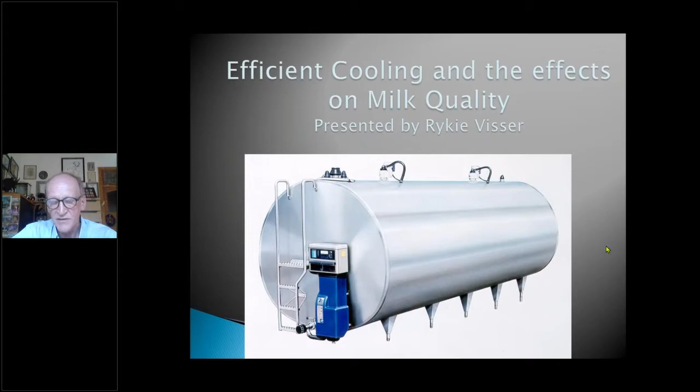It's important to tell you upfront that this is not a highly technical presentation. It's down to ground level, so we know where the problem starts, because that's where we have to go to ensure we have quality milk to be able to cool properly.

So the agenda, in short: we'll go back to basics and look at what milk is and its composition. Then we'll touch on the basics of cooling, milk hygiene, residues, cleaning of the system, somatic cell counts and bacteria, which I believe have a big influence on milk quality and cooling. Then we'll cover cooling technology, followed by a short presentation on basic calibration of thermometers, and after that a question and answer session.

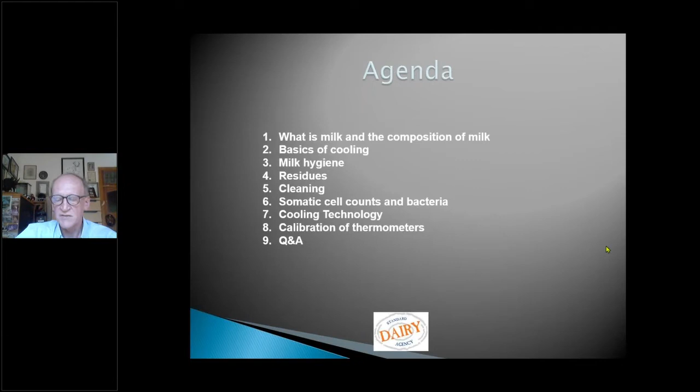First of all, let's look at the composition of raw milk. We all know milk consists of about 87% water, with the balance made up of about 13% dry substances, either suspended or dissolved in the water. Depending on various factors, the fat percentage can vary from 2.5 to 4.4%, and the solids-non-fat will contribute the rest.

Now what are the basics of efficient cooling? We all know milk is one of the most important animal products for human consumption, and maintaining its quality is very important. It starts at the farm level, and that's why it's important to look at the details on farm level and follow the process of collecting the milk. Cooling is one of the most efficient and effective ways to maintain the milk's freshness.

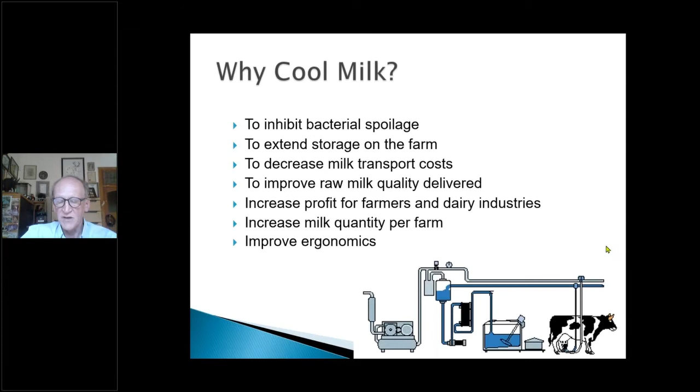Now where does it all start? I have to take you back to basics, because that's the most important place to start. It all starts at the milking process.

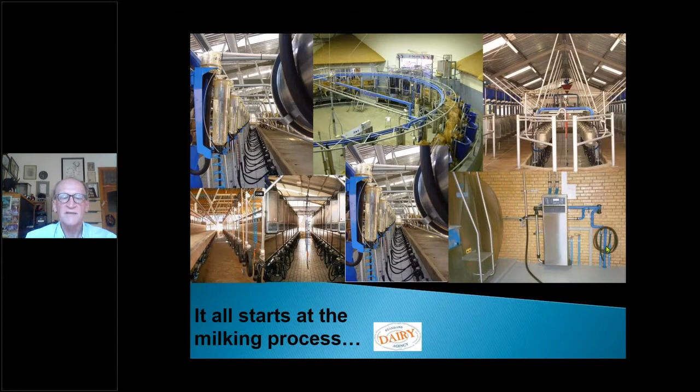In other words, the milking parlors—there are many different types, and that's not part of the scope of this presentation, but be aware that's actually where farmers spend a lot of money to harvest the milk. That's also where the quality of milk can really get bad. It also starts with how the cows are housed, where they live, and what feed they have, because that also has an influence on milk quality and, at the end of the day, the coolability of the milk. And also calf care.

Why calf care? Because those are your replacement cows for the future. Some farmers neglect their calf care, and once those calves come into production, they already have a lot of health problems, which can also contribute to bad quality milk. So it's a total holistic approach that we need to follow.

The design of facilities can also be one of the biggest advantages, or disadvantages if not done properly, referring to stress levels of cows. Cows are not meant to stand so close to each other in a holding yard. They get very hot, so heat stress plays a big role in somatic cell counts, especially in South Africa from November until March every year. There are a lot of problems one can resolve if the planning is done properly, to minimize stress levels on the cows.

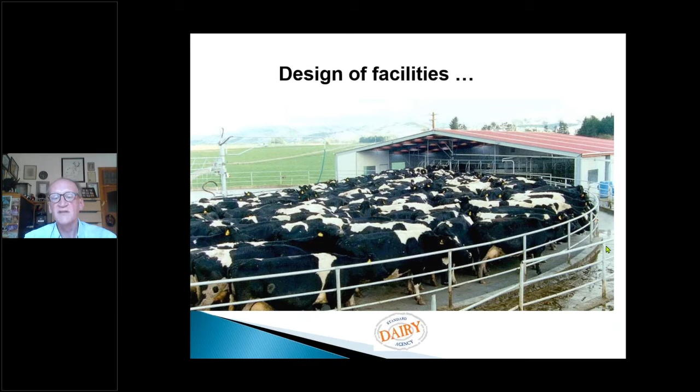If we look at milk hygiene and quality, the influences on the quality of milk consist of physical hygiene, chemical hygiene, and microbiological hygiene.

Physical hygiene means when looking at a surface, it seems to be free from impurities—that's normally after a pre-rinse through your system. A chemically clean system contains so little foreign matter, biofilms, detergent, etc., that no negative influence on milk quality can be detected. That's also normal after rinse.

Microbiological clean refers to a surface that harbors so few microorganisms that the quantity and quality of possible contamination of milk are of no practical importance to the quality of milk in relation to health or product quality. So in practice, we say that this surface is disinfected.

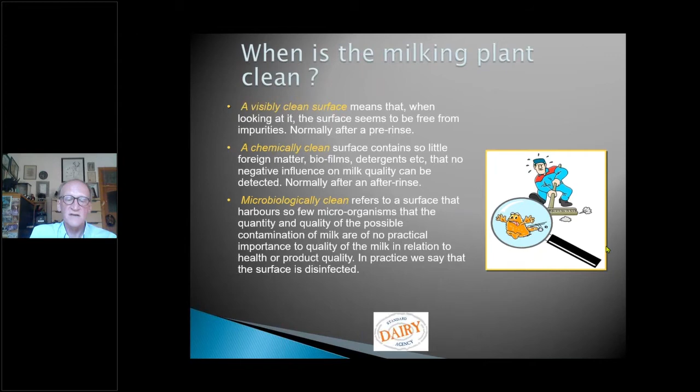So it's very important that milk cooling prevents the increase of the number of microorganisms. Just want to reiterate, it prevents the increase of the microorganisms.

There are a few places in any milk plant, or wherever milk is being transported, where one can do visible detection to see if there are problems. This will ensure that you can assist the farmer or processing plant, or whatever the case might be, to see where the problems are and how one can address that. Just a few pictures to illustrate this.

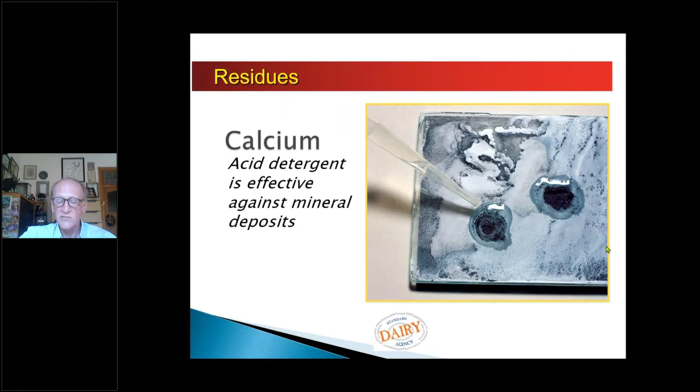If there is a calcium problem, one will normally see white deposits on the stainless steel surfaces, and an acid detergent is the most effective way to get rid of any mineral deposit. Barium is also sometimes a problem and can build up very quickly. The right cleaning routine and dosage is very important to maintain to ensure you don't have mineral buildups.

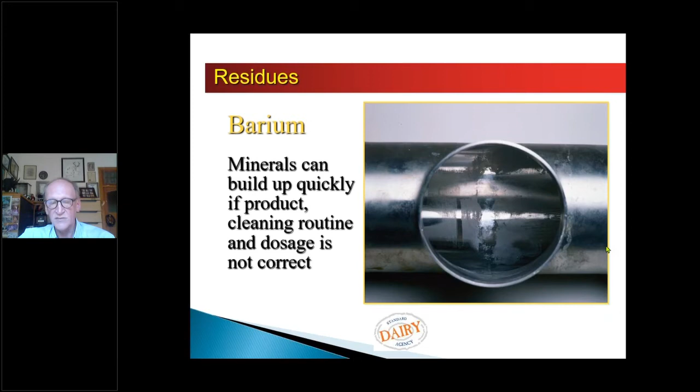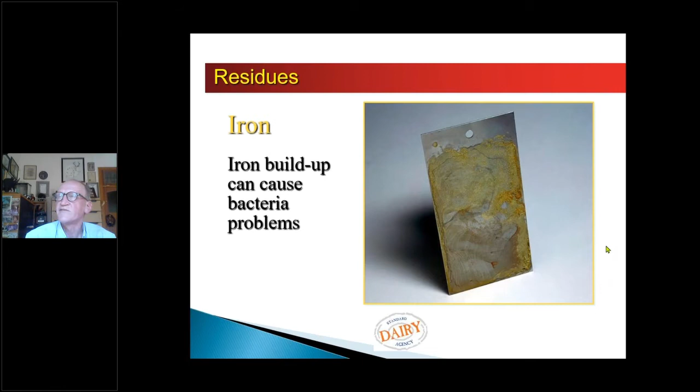Iron is very important in areas where the water contains a high level of iron, and that can cause bacterial problems, especially when left untreated, contributing to higher bacterial levels.

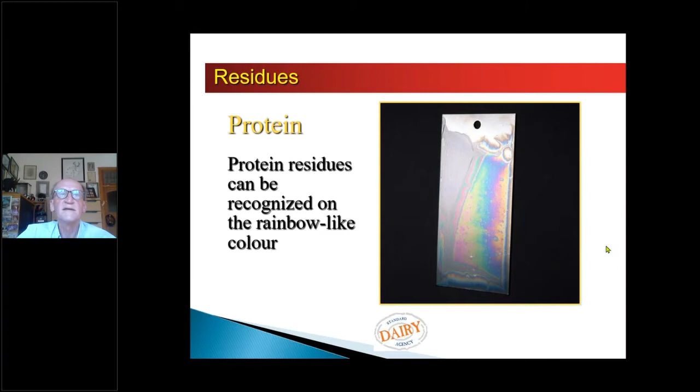Protein is very common. If there's a protein problem, one can see this rainbow-like color on the stainless steel surface, indicating a protein problem, which can be rectified very easily with the right dosage of detergent, which we will address a bit later.

Milkstone: minerals, fat, and protein can form a layer called milkstone. It is very hard to remove, and sometimes trying to remove it may lead to surface damage, which is no longer food hygiene quality, and we can expect bacteria problems in a plant. So the hygiene and cleaning program is very important to follow.

If there is a fat deposit problem, it's very easy to determine—you see the water beading on the surfaces—and also very easy to resolve by means of the right detergents and program.

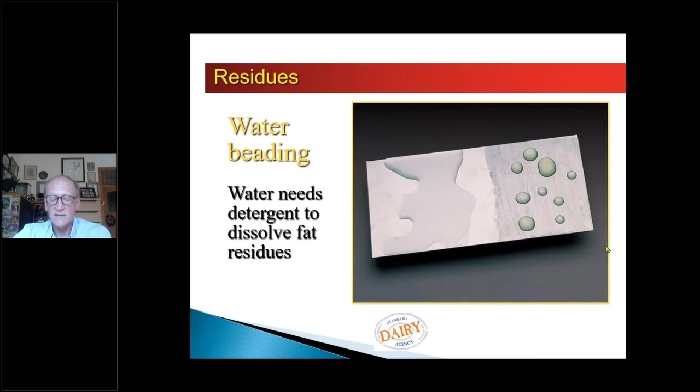Let's look at cleaning, because that's where it starts with the quality of milk, to ensure you can cool the milk down and take care of quality. So what determines efficient cleaning? First of all, there are 4 factors: temperature, detergent, time, and wash action.

You need all 4 of those components to ensure that surfaces in contact with milk are cleaned properly. I will not go into specific programs in detail. I know dairy processors have very high-end wash programs, but on the farm it's more simple, and I will just deal with the more simple way of cleaning.

Normally, after milking, we start with a pre-rinse, and it's not with cold water, because the milk is around about 35, 37 degrees when it leaves the cow's udder. If you use cold water to rinse the plant, it actually helps all the fat to deposit onto the stainless steel lines. So the pre-rinse must be done with lukewarm water around 35 to 40 degrees Celsius.

To ensure that you remove most of the milk deposits in the milk lines, you then do a circulation solution with an initial temperature of around 80 to 85 degrees Celsius, discharged at a minimum of 40 degrees Celsius. If it goes lower, you'll likely get more deposits again at the end of the wash inside the line. There's no use washing the line if you don't get rid of the water during the washing cycle, so it's important to determine the right amount of hot water available at the set temperature of around 80 to 85 degrees Celsius.

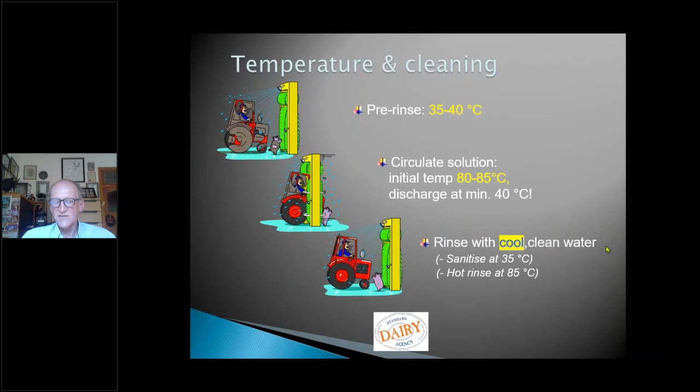Then of course you rinse with clean, cool water, not cold water, of around 35 degrees Celsius, to make sure that all the deposits are removed from the system.

What's important is that we basically use two types of detergents in a wash cycle: acids and alkaline detergents. The main difference is basically just their pH values. The pH value indicates the concentration of hydrogen ions in a solution, so a strong alkaline solution will have a very high pH value, and vice versa for a strong acid solution.

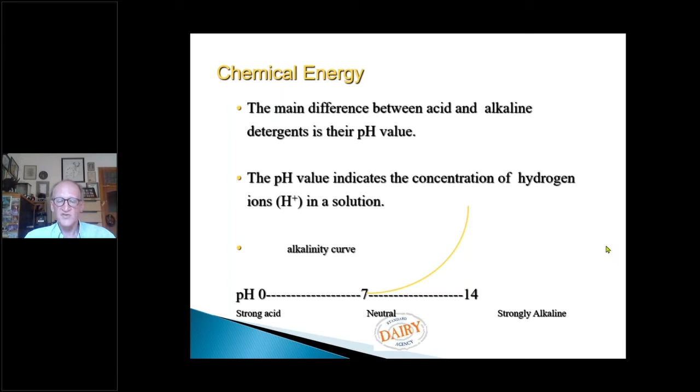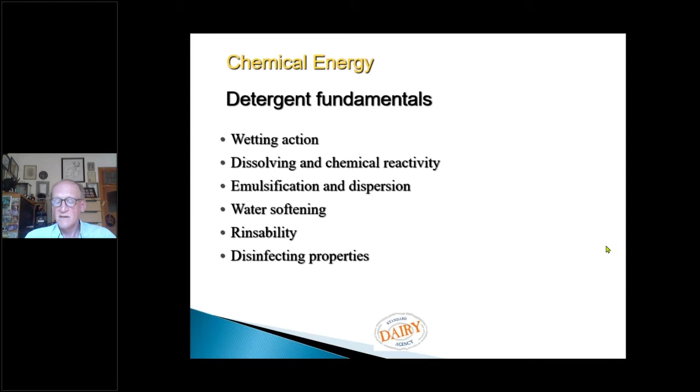So what are the good fundamentals for detergents? First, it needs to have a wetting agent. It must also dissolve and have chemical reactivity. The composition must also provide emulsification and dispersion, and water softening is important. Rinsability and disinfecting properties are also part of a good fundamental chemical. Most important is that detergents are there to kill bacteria as well, and that's where milk quality starts to get bad if you don't look after that.

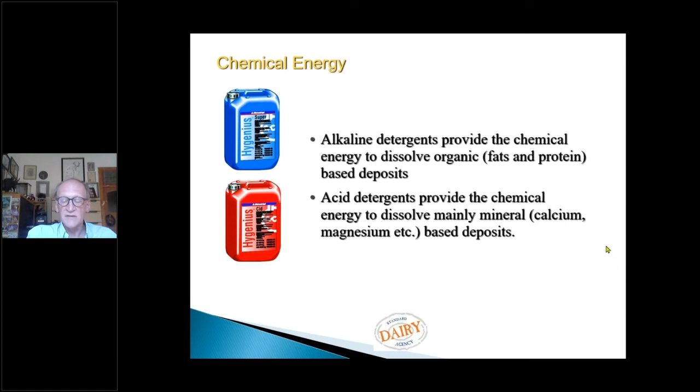Alkaline detergents provide chemical energy to dissolve the organics - fats, proteins, based deposits - while acid detergents provide chemical energy to dissolve all the minerals, your calciums and magnesiums. So alkaline for fats and protein, acids for minerals. Then you should have a good clean machine if you comply with all the different temperatures.

So what are the functions of detergent ingredients? First of all, the alkaline detergent transforms fat into soap, so-called saponification. It also solubilizes proteins with the help of chlorine in the detergent. In that way, one can get rid of fat and protein.

It also consists of sequestrants, which complex the calcium and magnesium. So if there's water hardness, this is the way the detergents can assist to get rid of those deposits, and it will also keep the hardness in suspension until it has been rinsed away.

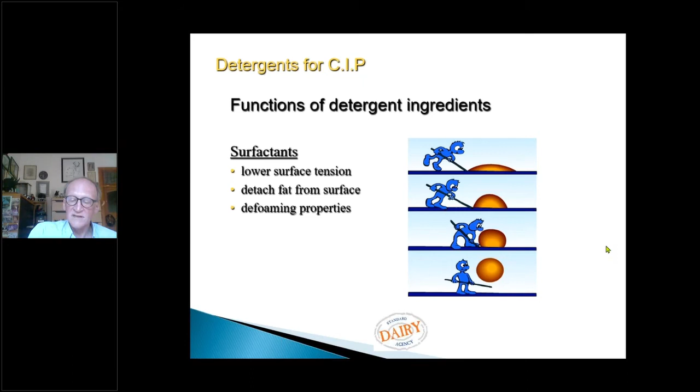It also consists of surfactants, which lower the surface tension and detach the fat from the surfaces, and also have a defoaming property. In this way, all the impurities are lifted and it's possible to rinse it away. Again, if the temperature is not high enough, you'll get all these deposits again on the stainless steel surfaces.

Acids, as I mentioned, are to remove all your minerals - descale and remove the minerals - and it also prevents bacteria growth in a low pH environment. That's why we leave the system as it is after it has been rinsed with the acid detergent, so that it will inhibit any growth of bacteria.

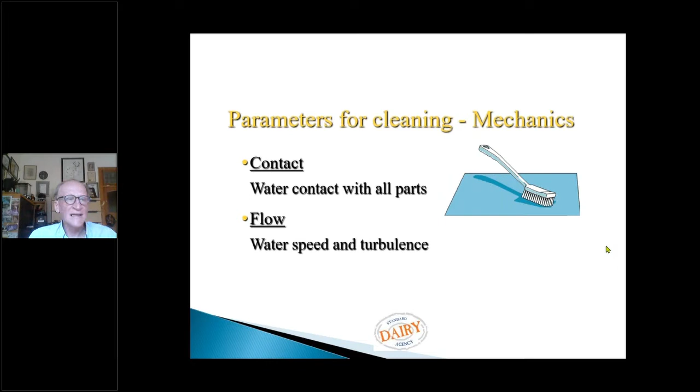So the parameters of cleaning: first of all, the water must be in contact with all the surfaces where milk has flowed through. There must also be water speed and turbulence to ensure you've got the action inside - you can compare it with a washing machine. So you need the action to clean inside the lines especially.

There are different CIP, or clean in place, programs available. Most systems make use of alternate cleaning, with an alkali detergent wash in the morning and an acid wash in the evening, according to the supplier's specifications. There's also alkali dominant cleaning, where alkali cleaning is done 11 to 14 times a week, and acid washing 3 times a week to once a month. It depends on the water quality and the cleaning problems on the farm.

Water quality and hardness matter because it depends on removing minerals. If the water is harder, you will need more dosages of acid washes.

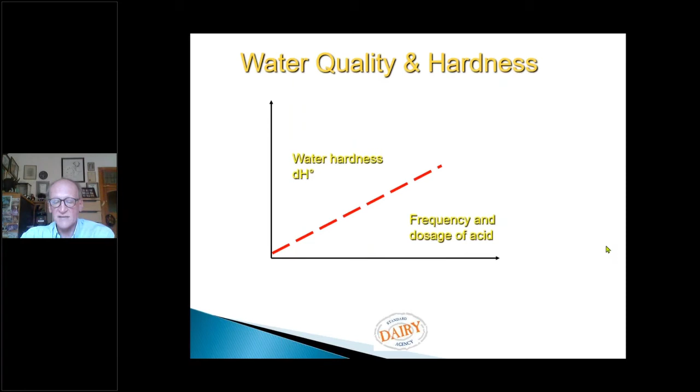This is important not only for the milking machine or cooling tank, but anywhere you work with milk and have transport lines in place. First, the design is very important for the slopes, and you must have automatic drain valves, so that after every wash all the water is drained from the system. If not, it creates an area for bacteria to grow.

Especially at the cooling tanks, it's easy to inspect the milk cooling tank outlet to see if any water is left there, and also to check if the rubber seals are cracked.

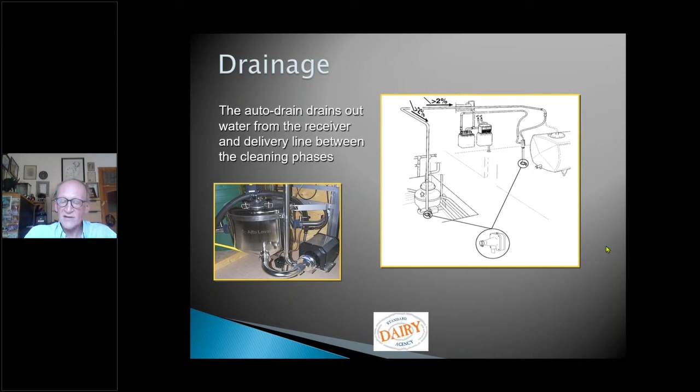One thing we have to touch on is somatic cell counts and bacteria counts, because that influences the quality of milk. I'll say it again at the end: you cannot cool quality into milk. If there is a certain level of bacteria in milk, this is the best it will stay. You will not pasteurize quality into milk or cool quality into milk.

So let's look at mastitis quickly. Dairy farmers sell basically one product, and that's milk. So we have to take all factors into account to ensure higher profit margins and also to minimize cost. That's the basics of dairy farming.

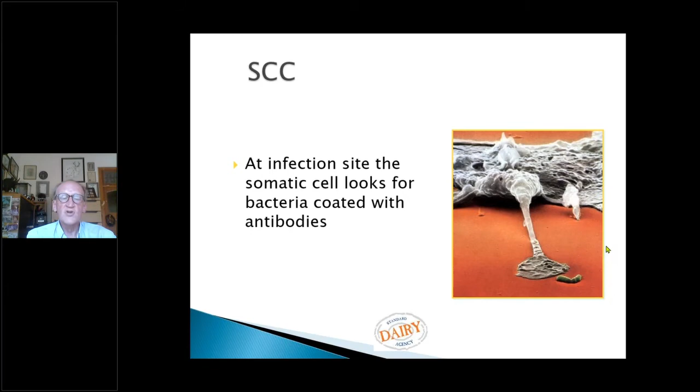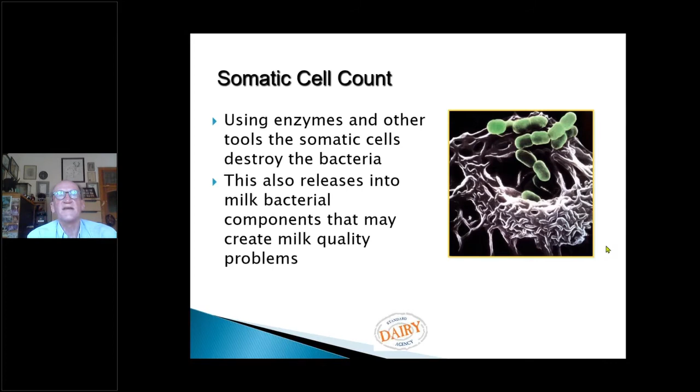Somatic cell counts: at the infection site, inside the cow's udder, the somatic cells look for bacteria coated with antibodies, then use enzymes and other tools to destroy the bacteria, also releasing bacterial components into the milk. That creates the milk quality problem. That's why it all starts with your calves and cows, to ensure they don't have mastitis, or as little as possible.

There's also a huge impact of somatic cell counts on the butter fat content, because the enzymes in the milk may damage the butter fat and release fatty acids into the milk, producing off flavors. Milk processors will tell you that bad quality milk also yields fewer kilograms of cheese or powdered milk. So it's important to look at somatic cells to keep them as low as possible, as it also influences the casein, which matters for cheese making.

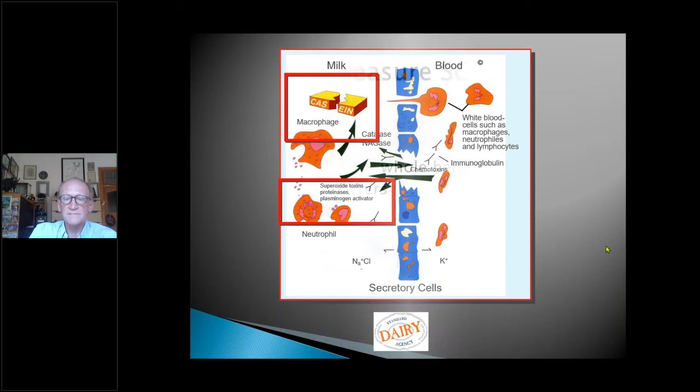So where do we measure the somatic cell counts? It's very practical to do. First of all, the bulk tank. It's also done on individual cows, or these days electronics have evolved so much that it's done per quarter with every milking.

These days you can measure blood content in milk, somatic cell counts, milk temperature, some enzymes in the milk, and even whether cows are on heat. There are a lot of factors that can be measured individually with every milking. If a cow has mastitic milk, it should be diverted and not go into the milk cooling tank, because it can contaminate the rest of the healthy milk.

The bulk tank is where many of you know, at farm level, one can test for quality. This is typically done by the milk processor, using a representative sample of all the cows' milk. Cows with serious mastitis, that milk must be diverted from the milk cooling tank and should not be fed to calves either.

It should be fed either to pigs or just discarded, because it is not healthy milk at all. So the rule of thumb is to agitate the tank for 5 minutes, then a sample should be taken from the top, and make sure all the items or equipment used are sterilized properly. This should also be done 2 hours after milking is completed, to ensure the temperature goes down to 4 degrees Celsius, which is the optimum temperature for cooling of milk.

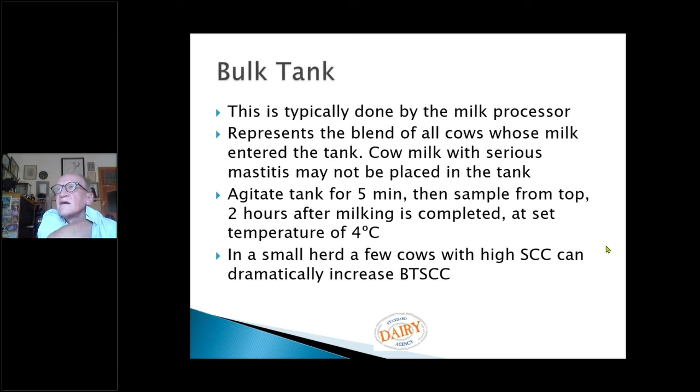Just an indication of how big the influence of somatic cell counts is - a normal total bacteria count or somatic cell count of 500,000 per milliliter will represent about a 6% loss in milk production. That is huge, and 500,000, I wouldn't say that's the norm.

Of course, one will always try to drive it down to about 200 to 250,000 somatic cells for the total herd in milk. But it can go easily up to 500,000 in muddy conditions, or if there is heat stress or any other stress condition on the cows. That can also be human inflicted when people don't treat the animals properly, or the structures might be of such a nature where cows are slipping, etc.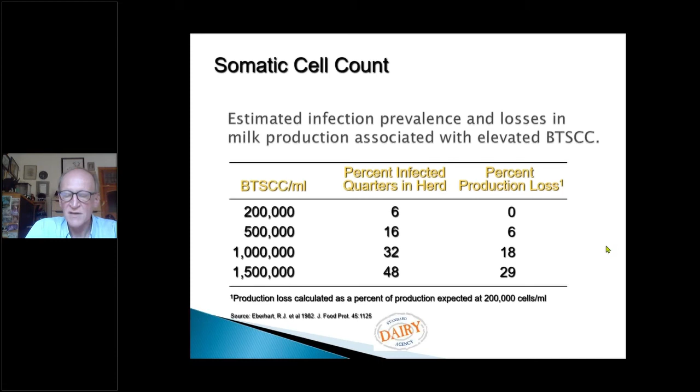So that causes the cows to release a lot of somatic cells, and that causes the milk quality to go down. We have to take all these factors into account. Not to say after this presentation that you will be able to know all these factors, but at least you can be part of the solution of a committee or some kind of meeting that you have with your farmers to try and address these problems.

So let us look at total bacteria count. Where does it start? It starts at the teat end and the exterior surface of the teat - that's the only way the total bacteria count can come from. That's why it's important that you have the right procedures when preparing the cows to be milked. It seems like a silly point to talk about, but this is really one of the biggest problems where farmers suffer from total bacteria count.

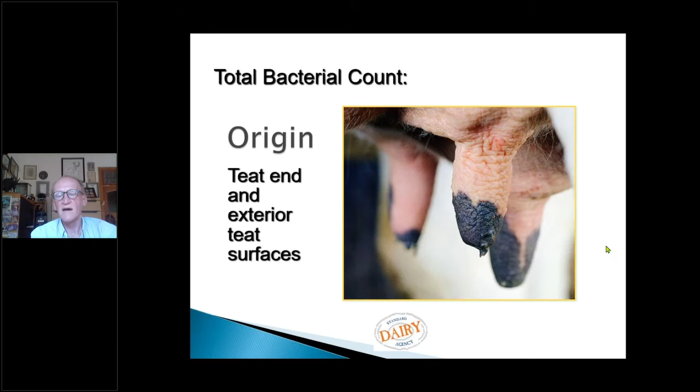You have to start at the basics, and that's at the cow's teats. That's the only part of the cow that's in contact with the milking machine or the teat liner, and that's where many of the problems can start.

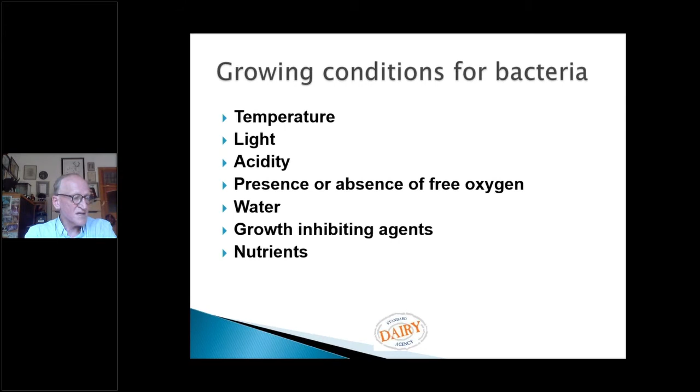If we look at temperature and the growth of bacteria, that's why we say that 4 degrees is the most efficient temperature to cool milk and keep it at 4 degrees Celsius to maintain the cooling chain. I'm not talking about long life or so-called ultra pasteurized milk, but just your normal milk. When milk is open, it should be cooled down to 4 degrees Celsius as quickly as possible. You see the influence there - if it's not kept at 4 degrees, it goes up to 20 or 30 degrees Celsius, and your bacteria growth is exponential.

Let's look at the cooling technology - what is available on the farm and outside there? First of all, we have to realize that there are different bacteria in the system. First, those called psychrophilic, they love cold temperatures, anything from -2 to -5 degrees Celsius. Then you get psychrotropic, 0 to 20 degrees Celsius, mesophilic, 10 to 30, thermotropic, 25 to 45 degrees, and thermophilic, 30 to 50 degrees Celsius.

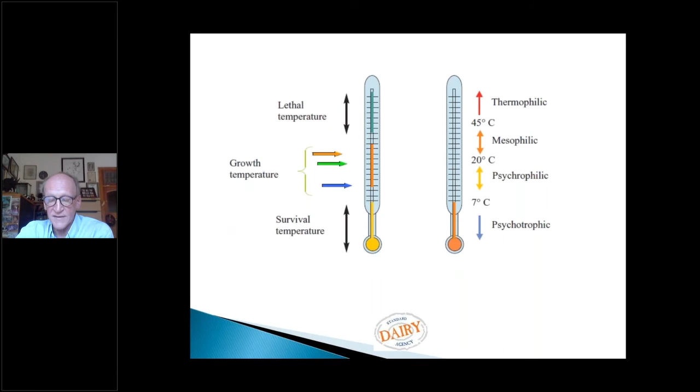So that's where we have to find a medium or a way to cool the milk down to, and the best level is 4 degrees Celsius. Then we are safe in accordance with the regulations to ensure that the bacteria growth will not be as bad as if it's too hot, let's say around 12 or 13 degrees Celsius. But again, if it's too cold, you have psychrotropic bacteria growth. So it's important to have the medium.

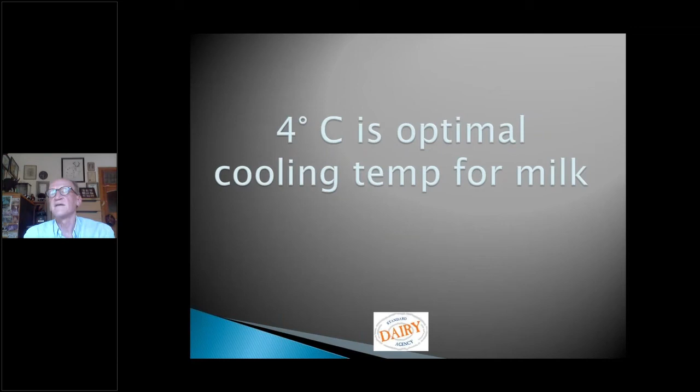So 4 degrees Celsius can be seen as the optimum cooling temperature for milk, and to keep it in the cold chain. The rule of thumb is to cool the milk down to 4 degrees Celsius within 2 to 2.5 hours after milking. That's very important that we do that as quickly as possible, and that's where technology comes in to ensure that we can do that.

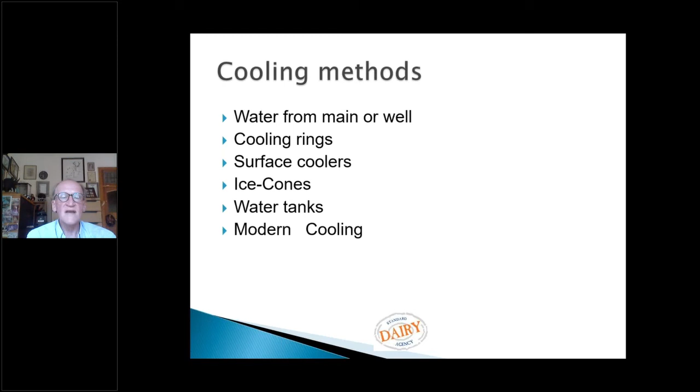There are different cooling methods. I'll just go through the few basics: first, water from a main supply or well, cooling rings, surface coolers, ice cones, water tanks, and then modern cooling technologies. On farm, we make use of cooling tanks or silos, depending on the scale of economy, and then of course pre-coolers or deep coolers and condensing units, which are used to cool down.

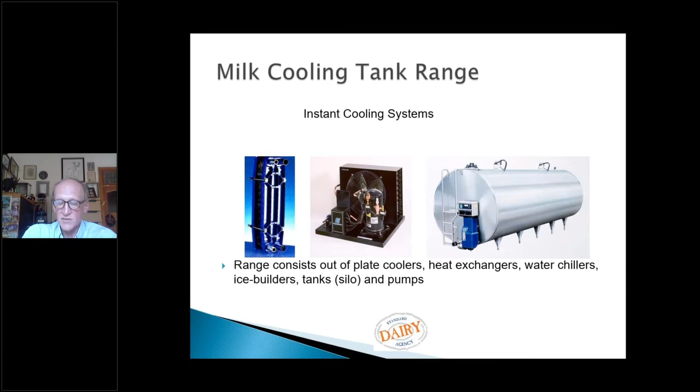Cooling tanks are specified by codes - not to bore you with a lot, but when you hear about a cooling tank, let's say class 2B2, it means it is manufactured or specified for 2 milkings a day, in the morning and the afternoon. It will be able to cool down with an ambient temperature of 32 degrees Celsius, and it will take less than 3 hours to cool down for that specific cooling tank. Of course, the condensing unit needs to be specified and designed according to this, and also whether there is a pre or deep cooler or not.

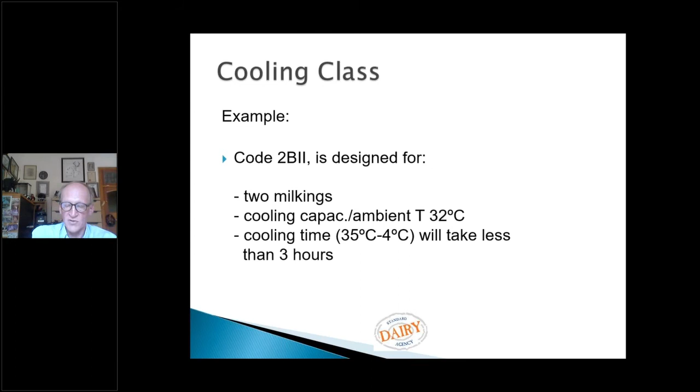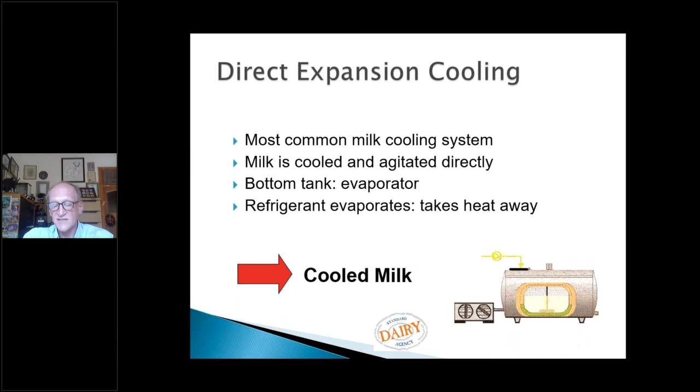The most common milk tank is designed on direct expansion cooling. So milk is cooled and agitated directly into the tank, and at the bottom part you will have your evaporators. In plain words, that will just extract the heat from the milk and cool the milk down. The refrigerant will react just the same as your normal fridge does.

Ice bank cooling is an older type of cooling tank. We have ice water in a ring around the cooling tank, and that will transfer the heat from the milk and cool down the milk.

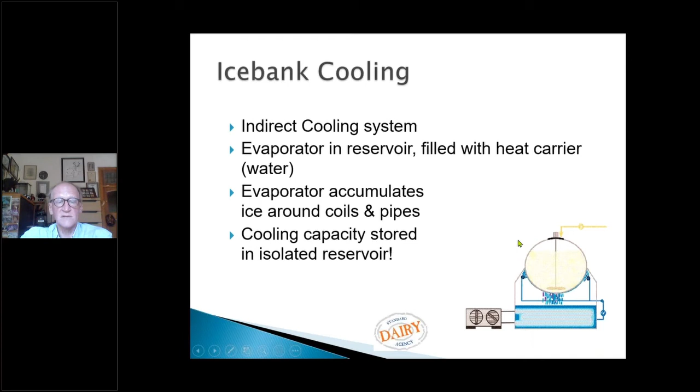Clip-on plate coolers will cool the milk before it reaches the bulk tank, and dairy processors use that a lot as well during the processing of milk in different stages. It can be used for pre-cooling or instant cooling. Pre-cooling refers to using well water or normal tap water, which is around 18 degrees Celsius. For instant cooling, we use ice water, which is around 1 to 2 degrees Celsius.

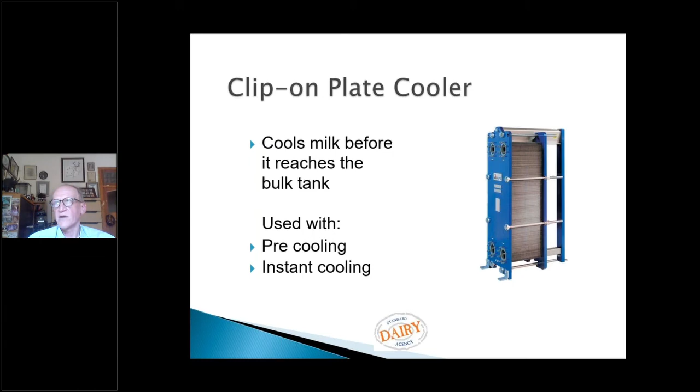The plate cooler, in basic principle, uses corrugated stainless steel plates in different configurations. Milk flows inside between these plates, and on either side the refrigerant takes up the heat from the milk and cools it down.

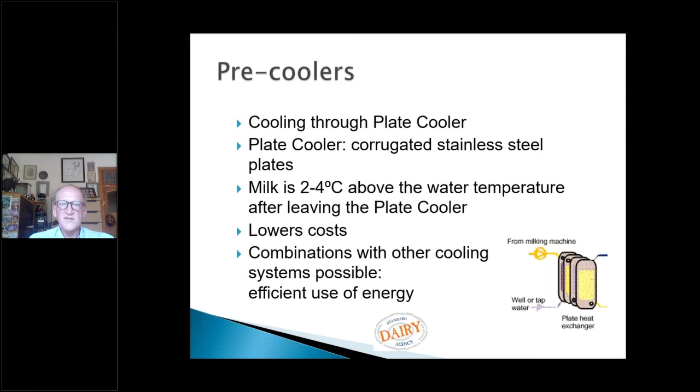As a rule of thumb, you cool the milk to 2 to 4 degrees Celsius above the coolant water temperature. For the pre-cooler, we use well water or tap water at 18 degrees Celsius, so you should be able to cool milk from 37 degrees coming from the cow's udder down to about 22 degrees entering the cooling tank. From there you cool it from 22 to 4 degrees as quickly as possible, but not more than 2.5 hours. This gives the benefit of not needing too many compressors to do the hard work, since the pre-coolers assist in that.

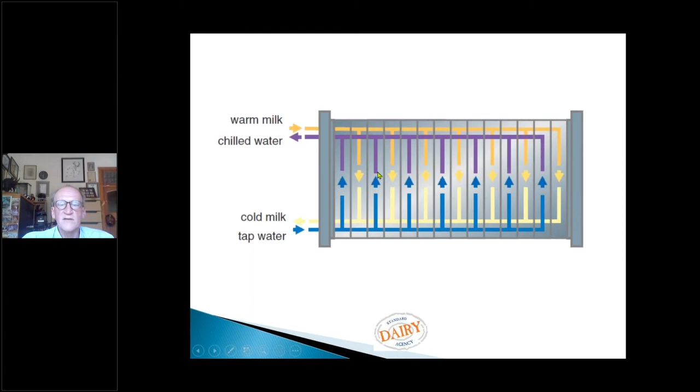With an ice bank, this is just an indication that your warm milk will pass through while cold water flows on either side to cool down the milk.

With instant cooling, you use ice water of 1 to 2 degrees. Remembering it's 4 degrees above the cooling medium, you should be able to get the milk into the cooling tank at around 5-6 degrees Celsius, meaning you don't need a lot of capacity on your condensing unit to bring it down to the required 4 degrees within the 2.5 hours. This is one of the most effective ways of cooling milk as quickly as possible.

Remember, that's the key word - we want to bring it down to 4 degrees as quickly as possible to inhibit bacterial growth. The longer we wait, the more bacteria we have, and we cannot cool it better after that. Once the milk is in the tank with that amount of bacteria, it's there - you cannot pasteurize or improve the quality after the fact.

So with an ice bank tank, it all depends on the economy of scale, because it costs money to generate the ice water. It's just a calculation of how much milk you want to put through - around 2.5 times the volume of water needed for one liter of milk, so 2.5 liters of coolant per liter of milk. It's an easy calculation - what is the economics about it?

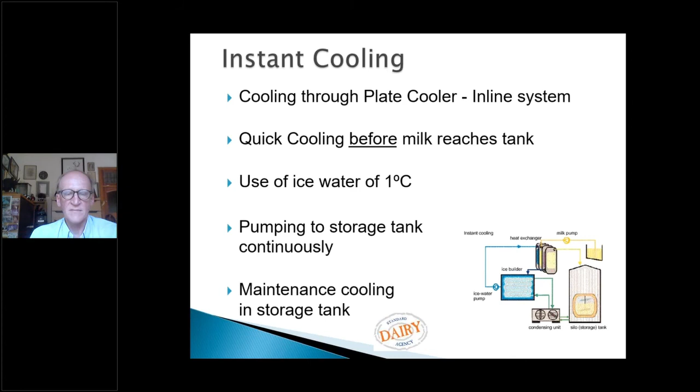So what influences the choice of cooling method? First, the daily milk volume - how much milk do I get from my cows? That can range from 12 liters per cow, typical of pasture-based farms in KwaZulu-Natal and the Western Cape, up to 40-60 liters a day per cow, depending on feeding strategy and the economics involved. Remember, feeding cost is about 70-75% of production cost. These days many small-scale farmers tend to sell out to bigger farmers who are becoming mega farms, with 4, 5, 6, even 10,000 cows in milk on one farm.

It's also influenced by the number of milkings for storage. In the past many farmers only milked twice a day, but milking 3 times a day actually lessens pressure on the cow's udder and reduces health problems. So people are moving to 3 times a day, or even 4 times for very high-producing cows. But that also brings other factors to consider, like the number of laborers needed and related social issues, plus feeding practices that need to be adjusted accordingly.

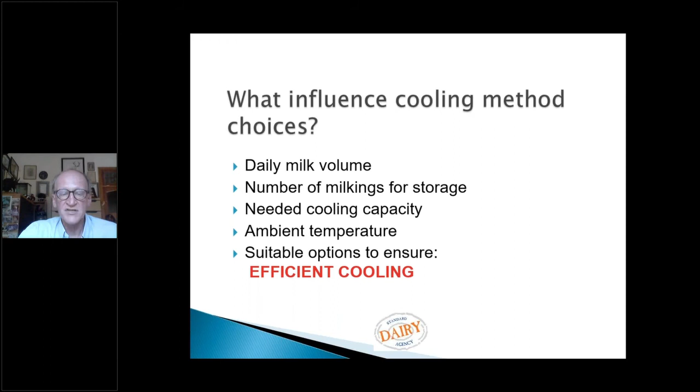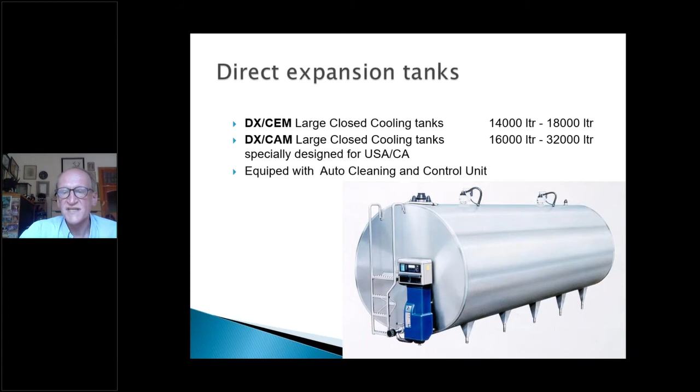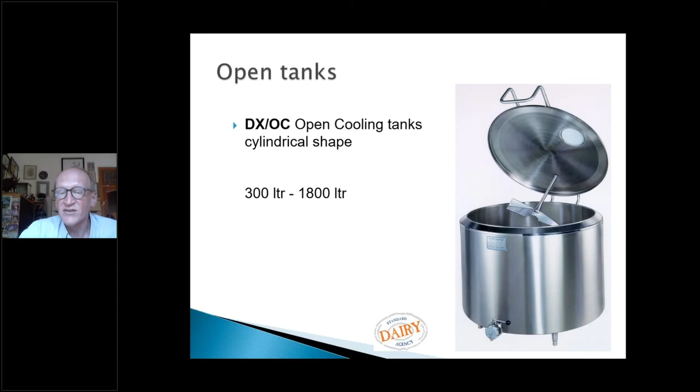Just a few examples of cooling tanks: direct expansion tanks ranging from 14,000 to 32,000, and of course the vertical silos can also be larger. Open tanks are used for smaller enterprises, but they're not a CIP system and are manually cleaned, which can pose some problems. Older types of tanks exist but aren't used very commonly these days.

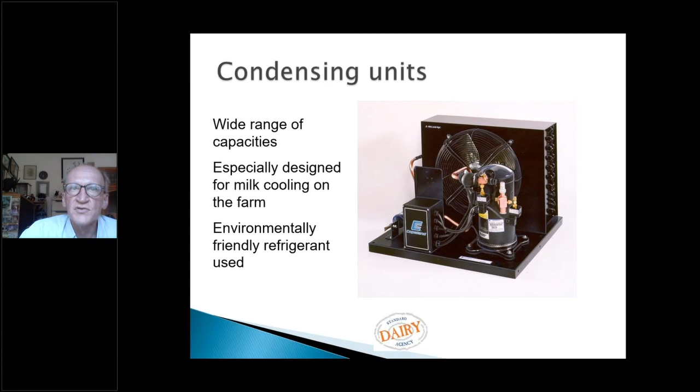And as mentioned, condensing units are calculated according to the cooling capacity you need, whether or not you use pre-coolers or deep coolers.

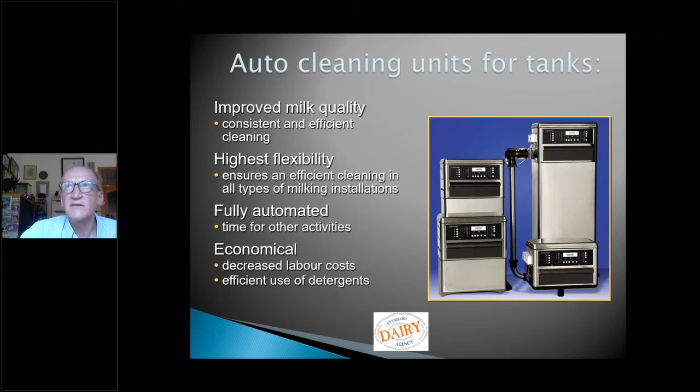Automatic cleaning units are available that ensure correct automatic dosage of acid and alkaline detergent. The whole cleaning process is pre-programmed to ensure water temperature and rinsing temperature stay within the set limits.

Again, I want to re-emphasize, one cannot cool or pasteurize quality into milk initially. The best it will be is the way it ends up in the cooling tank the first time. I was asked to touch on the basic calibration of thermometers, for those of you going onto the farm, to ensure they are correct, because you don't want to give the wrong advice to the farmers.

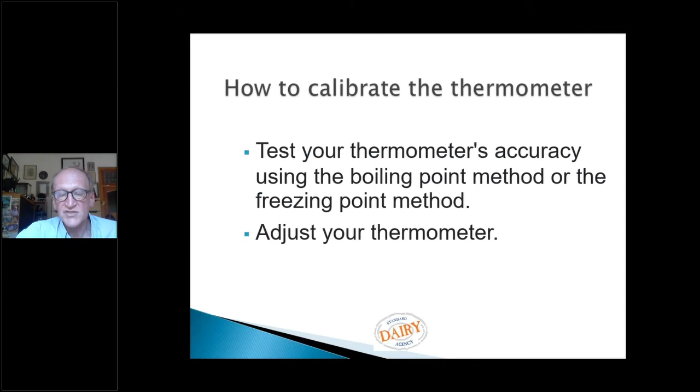There are two ways to do that: either the boiling point method or the freezing point method, adjusting your thermometer accordingly. For the ice point method, fill a large container with crushed ice and water, and submerge the thermometer stem into the water for about 30 seconds. Then hold the calibration nut and rotate the top part down to 0 degrees Celsius, and it's calibrated according to the ice point method.

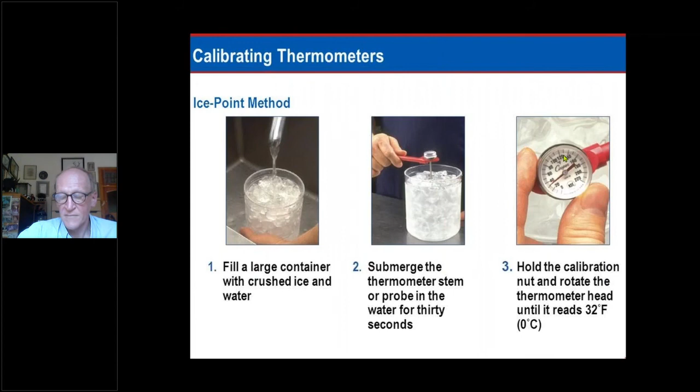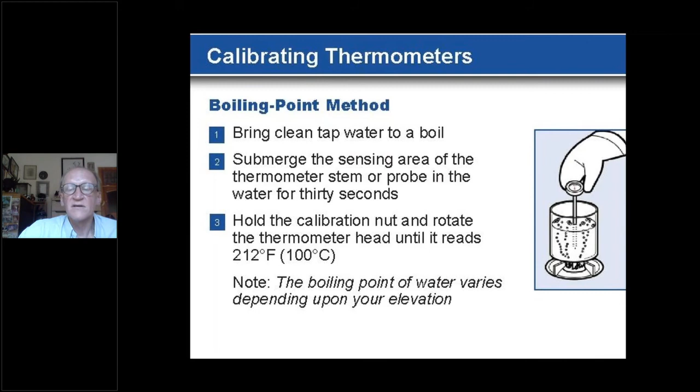If you want to make sure, you can use the other method, the boiling point method, where you bring clean tap water to boiling and keep it at the boiling point. Again, submerge the sensing area of the stem or probe into the water for about 30 seconds, and adjust it on the dial to 100 degrees Celsius, which is the boiling point. But remember, the boiling point of water can vary depending on your elevation or height above sea level.

Just to conclude, it's important, if you go on a farm or wherever you go to do problem solving, to do it as a team approach. That can consist of the milk buyer or processor, the feed consultant, the veterinarian, the milk hygiene specialist, the milk equipment representative, and the herd manager, who might be the owner. We found that doing this on a monthly basis, a quick check-in with everybody to see what the problems are and address them accordingly, setting up an action list and doing training, helps a lot to ensure you resolve problems on farm and also set up an SOP accordingly. Thank you very much.

Wow, Rykie, that was really great. I think for all of us listening, we got a lot more than just temperature. I love what you said about how we can't cool quality into milk. At the end of the day, if we're not looking at those basic things, we're going to land up with problems in the milk that we can't take care of when we get to the cooling step. So thank you very much for that.